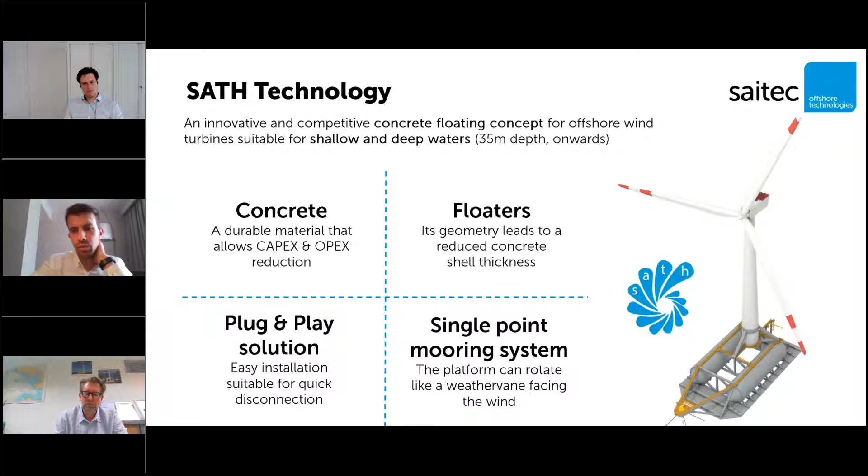Key point: concrete as a reduction, let's say a competitiveness producer, and reduced capex and opex when compared to steel solutions, and then the whole plug-and-play solution, which enables a quick, fast, and risk-reduced operation for the installation. But that was just the intro for the technology.

Now we want to present the flagship project we are working on, which is the DemoSATH project, this 2 megawatt demonstration project. I'm actually introducing you through a short video.

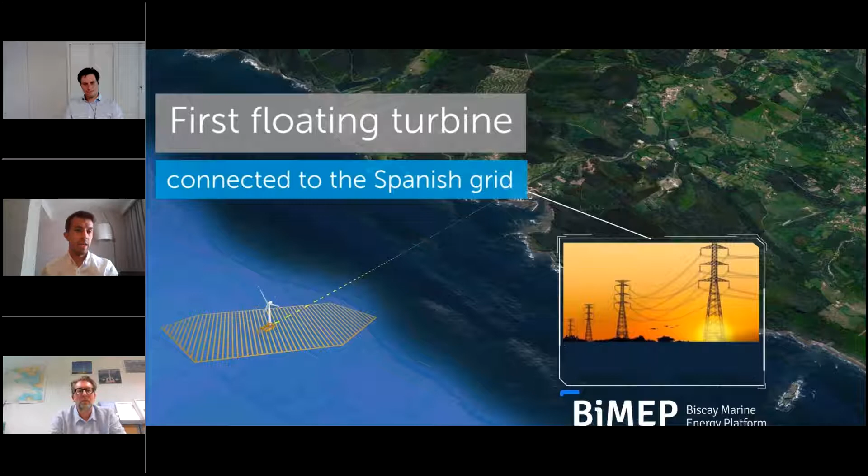It's quite an important milestone for us. It's a project that will be installed off the coast of the Basque region. It will be actually the first platform to be connected to the Spanish grid, providing energy to almost 2,000 households in Spain, or the equivalent to the consumption of 2,000 Spanish households.

It's a project that will take place, that's taking place in its construction phase in the port of Bilbao, and the location site for installation is the Biscay Marine Energy Platform, which is a public infrastructure with all the permitting granted, and also the electrical infrastructure already laid. It's actually a very interesting project, obviously, but also for the region and for the country.

Key milestones, I would say, are the rated power of 2 megawatts, 2,000 households as equivalent energy production, a very high level of local content, about 75% of the capex going to the region and to the area close to the construction site, and 85 meters depth as the location depth.

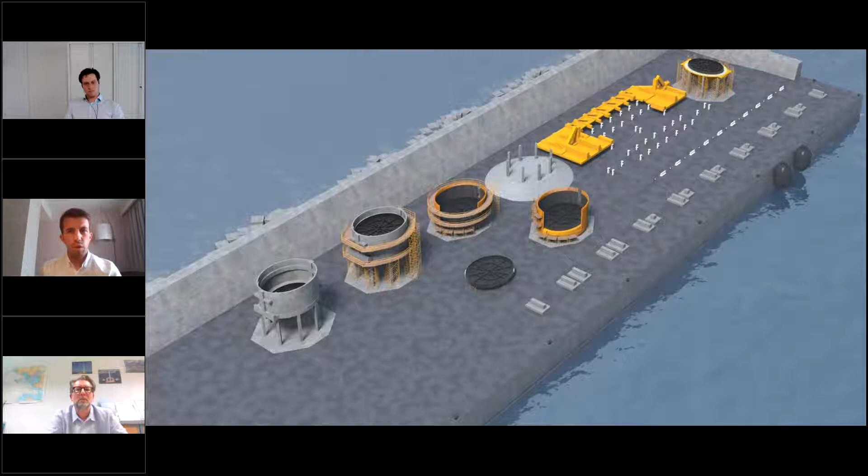It will be the first floating offshore wind platform connected to the Spanish grid, and it will actually be the third concrete technology worldwide. So we'll go through a bit of the construction methodology and how we are putting this together, so you can better understand the scheme for the supply chain and how local the project is.

So that's an overall view of the construction site as it is. We'll be sharing some photos afterwards, and this is just to represent the layout, which will include the precasting of several elements of the platform, and then a final position for the assembly of the whole platform. Good point is that the whole system will be assembled in the port of Bilbao.

Just to show you the process of how one of these elements, or these pieces of the Lego, are being pulled together.

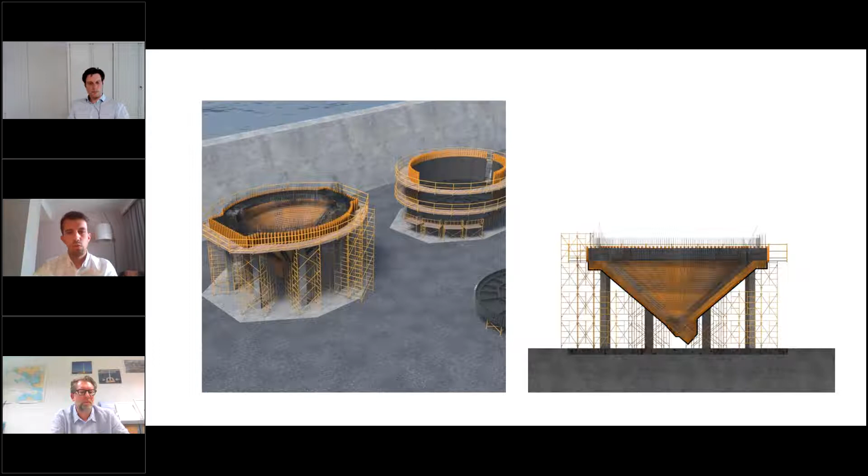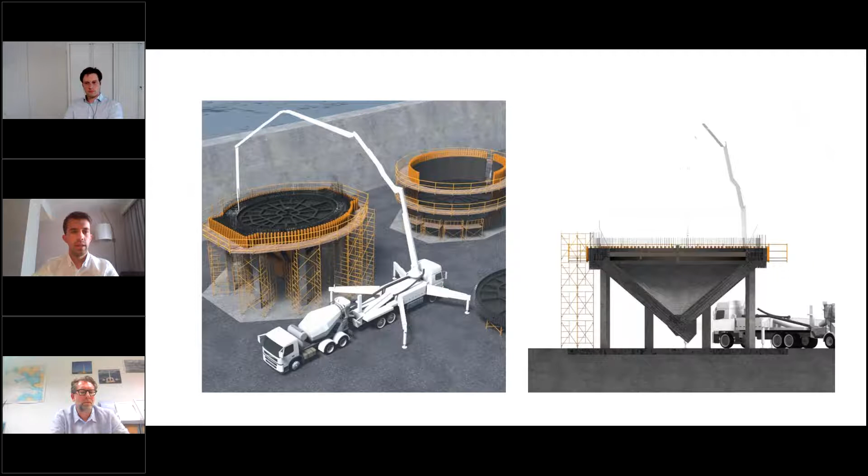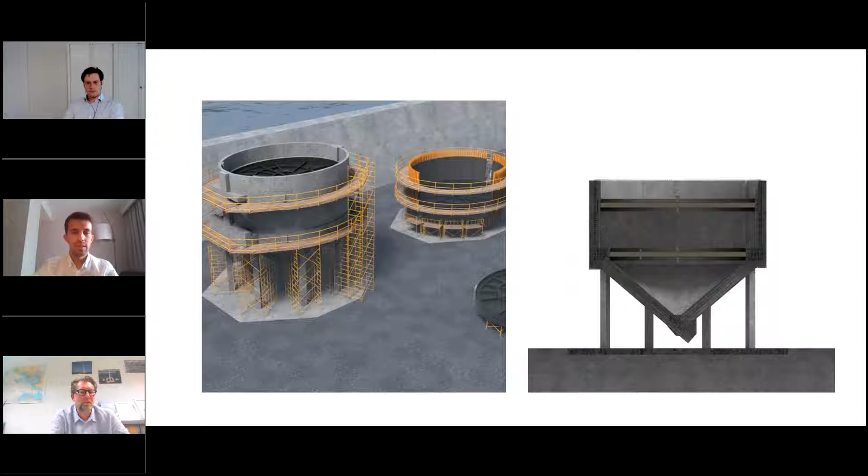We're working with standard concrete fabrication techniques and technologies: formworks, reinforcement, and then we pour concrete. We pour concrete by phases, introducing internal bulkheads inside of the hull to stiffen it. That's the process we're following to cast these spectacular elements that will afterwards be assembled all together.

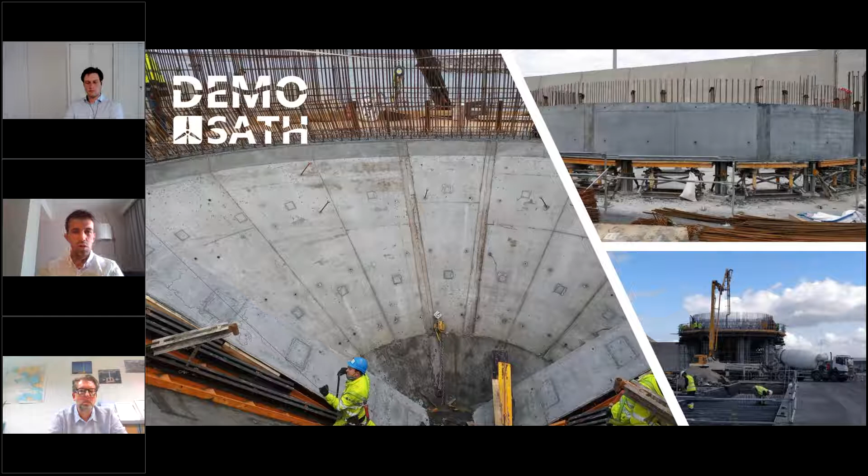That's the stage we're at the moment - manufacturing and casting these concrete pieces. These are some of the latest photos coming from the work site from last week. Things are starting to take shape. It's quite impressive, Bruno knows it well.

Ideol went through this fabrication a while ago, and now it's our time. It's impressive to see how big these things are, and how massive the involvement of suppliers is required.

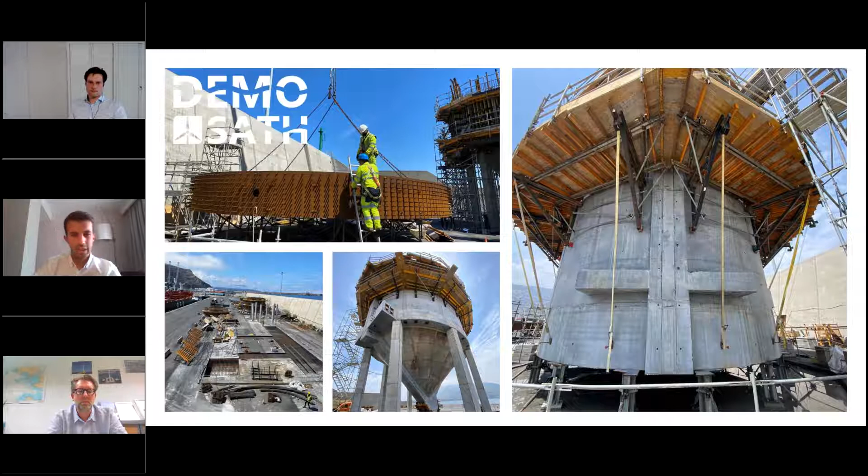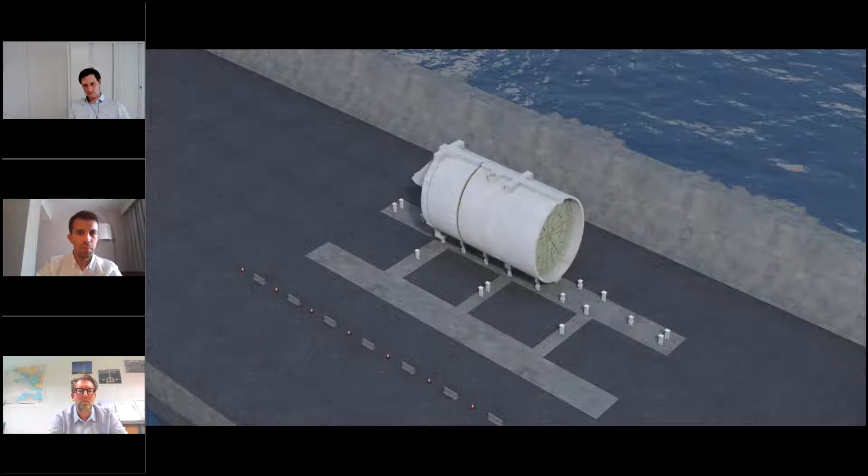Once the arrangement of different precast elements is performed, we'll go through the assembly of the different elements. We'll place them on a reserved area for the linkage of these different pieces and sections, putting together the whole system. At the end of the day we'll have the whole platform, tower, and rotor nacelle assembly all together on top of the quay.

That's also showing quite an interesting risk reduction approach, which might or might not be taken for commercial projects. For commercial projects, the onshore works will probably stop at the assembly of the floater rather than also installing the turbine. But it's a way of showing it's feasible.

Once the whole thing is assembled, we'll load it into a semi-submersible barge to put it afloat, and then have it ready to be towed to its final location, in BiMEP, the center we mentioned. So that's a very quick look at the whole project and process.

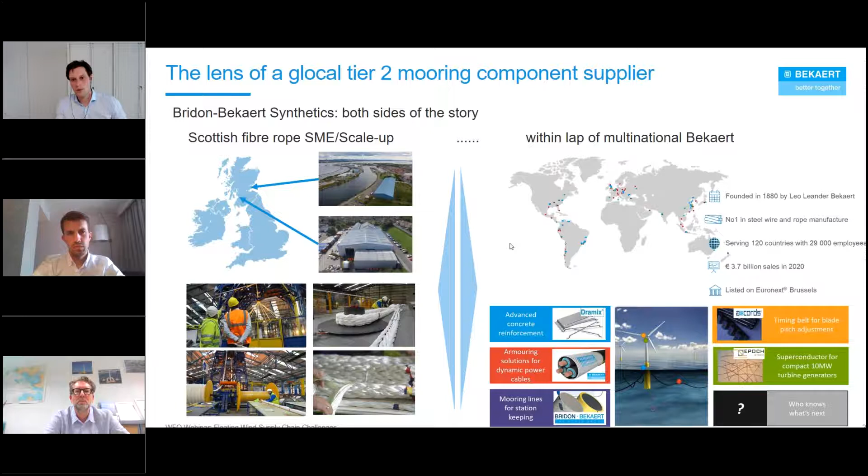Now, when it comes to supply chain, for us as the synthetic cable part of the mooring package - a subcomponent of that package - we often get a lot of questions, at least from the industry, when it comes to steel moorings in general. This is the weapon of choice for that first wave of demonstrators and pre-commercial farms.

But the observations customers make to us is that capacity is tight. This is a discrete process - you make one chain link at a time, so to say. Also, the supply scene itself is relatively tight. You always have an incumbent player and a challenger, but beyond two, maximum three, the landscape gets pretty thin rather quickly. To convince those people to add capacity in the upcoming quarters and years to be ready for the middle of the decade is also not so straightforward.

That whole metallurgical industry is quite capital intensive - you need furnaces and what have you. So also there, a lot of discussion on business plans.

And once you can leave the factory, you enter into the realm of a new set of constraints or challenges. When you enter the port area, you need, to use a bit the metaphor from David, football fields in terms of storage space, preparation space, marshalling yards. And then still you need to find the right boats in terms of deck space and winches that can actually deploy all these big, massive steel mooring sets.

Now, when we engage, and being predominantly a steel company ourselves, when you want to solve some of these dilemmas or challenges, you obviously run into sometimes the corporate logic of - it's not easy to invest, or the moment might not be there yet to invest now, as technologies are unclear, a TLP versus a SPAR, class societies are still in flux, where demand will appear first is still widespread. It's even in some cases not clear who the customer is - will it be the operator or the floater, especially when you're a mooring component?

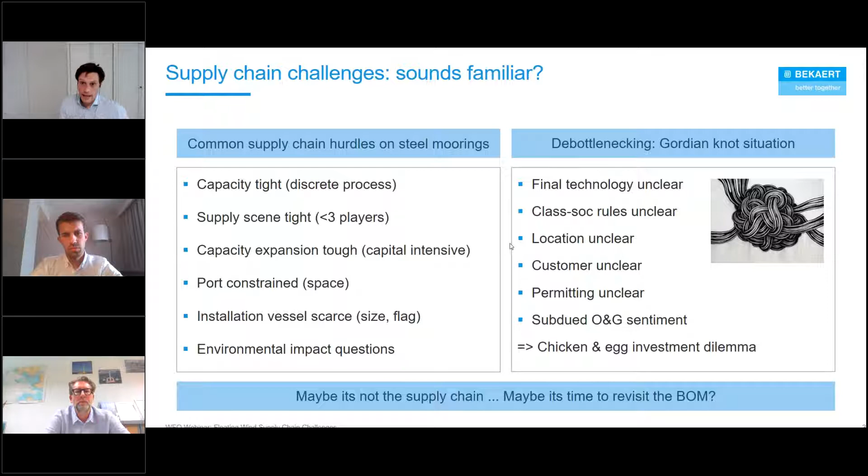That's also a bit how this Gordian knot thing got solved at the end, where you had Alexander the Great thinking differently and pragmatically - he just took his sword and cut the knot in half. For us, anno 2021, today's version of that sword is really taking the courage and the adventure to step away from some of the proven mooring concepts out there in oil and gas, and actually leverage other concepts, other solutions, and apply those on floating wind.

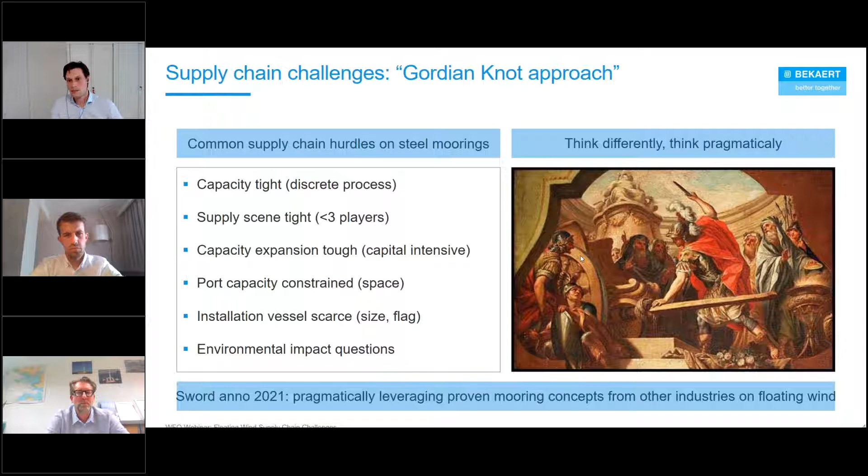To give you an example, speaking for synthetic moorings in general, I think when you compare it to the steel package you're all familiar with, you move from a discrete process to a continuous process. There's quite a bit of suppliers, I'd say more than 10 worldwide. For capacity expansions, you don't need furnaces, but you move more into light, fast, textile-like equipment where you don't need big foundations, so you can scale up with demand pretty smartly.

In terms of floor space, you move from football fields to rather tennis or padel courts, so there too you enlarge the playing field quickly. For installation vessels, indeed, you easily go to local crews and vessels which are a tad smaller than what we have today for these massive steel structures. Also on the environmental side, as weights go down and supply chains become more flexible, there is indeed a significant benefit to observe.

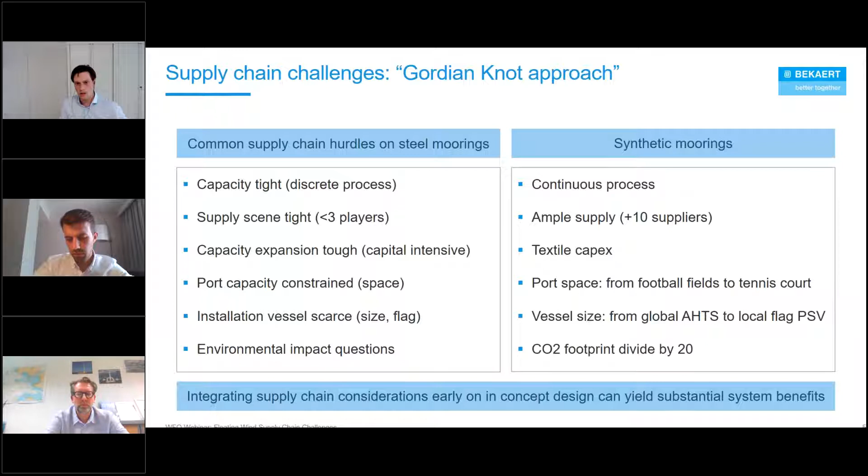So from our side, what we're doing is integrating that thinking, and we try to match that a bit with the needs of the industry moving forward. For that, just to make a numeric example - none of this is science fiction - we took here a projection for the industry forecast.

And maybe there are even more optimistic ones if I listen to the introduction. But this one stated that in 2030, at the end of the decade, there would be 2 gigawatts of capacity added that year. And 2 gigawatts would be roughly about 200 turbines, I guess. With 3 lines per turbine, that's about 600 anchor lines.

Typically when people hear these numbers, we get a lot of questions about what that means for us. And typically the message we bring, at least from a synthetic point of view, is a message of reassurance. Because if you look at today, the golden triangle - FPSOs, Gulf of Mexico, Brazil - you easily have 20 lines with 3 segments each. So in terms of length, this would be about 60 lines for floating wind. That means one FPSO in these regions, 10 of those would actually make up 2030 demand at the end of the decade. To put that in perspective - not 10 years forward, but 10 years ago in 2010 - already 26 of those got installed worldwide.

And knowing the oil and gas industry, well, if there's one thing they're extremely good at, it's making sure a plan B is available. So those years were not just a one-off, but even at the height of the FPSO boom, there was an omnipresent supply chain on standby, with almost 100% idle backup capacity.

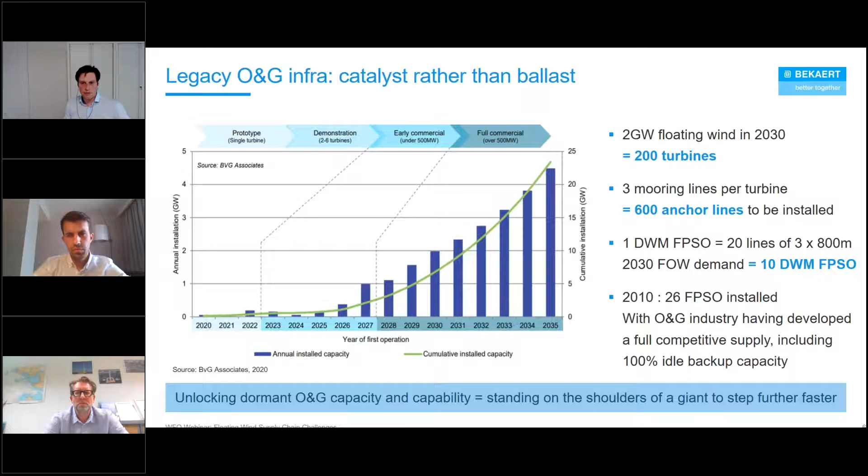And while we do so, I borrow a bit the logic we have at group level at Bekaert, where we always balance what you do local, what you do global, what you do central, what you do distributed. For cables, we work along two axes.

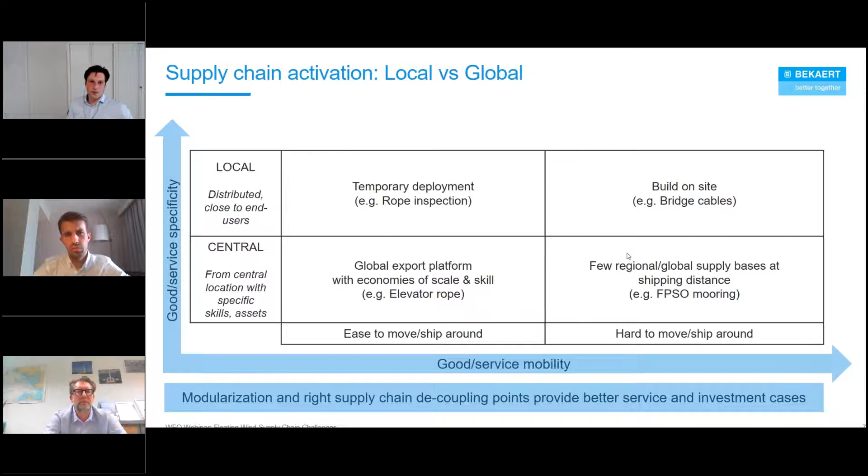Just as an introduction, I think those were the three considerations as a component supplier, which I've summarized here. On the one hand, a lot of challenges, and we hear a lot of frustration, but from our point of view, supply chain starts with what we want to supply, and there's a lot of opportunity to not just copy paste the conventional technologies, but to walk along a path with fewer obstacles.

And in that path, I think we see oil and gas as a giant on whose shoulders we can stand to look a bit further, rather than a ballast. And when we do that, we are looking for the right decoupling points so that it's easier for us to commit to investments early on and upfront. That's something we typically do closely together with the rest of the supply chain, the customer base in particular. Thank you very much, Christof.

Very quickly, a first question to both of you. Scaling up - Christof, you addressed that a little bit. One unit, one floater is 3 to 6 or more mooring lines. Let's not underestimate the need for redundancy, when you're talking about delivering and installing 50 units over a 2-year period, which is where we're going with bigger wind farms, bigger financial commitments that need to see revenue much faster. Where are the perceived bottlenecks and where are the real bottlenecks in your opinion?